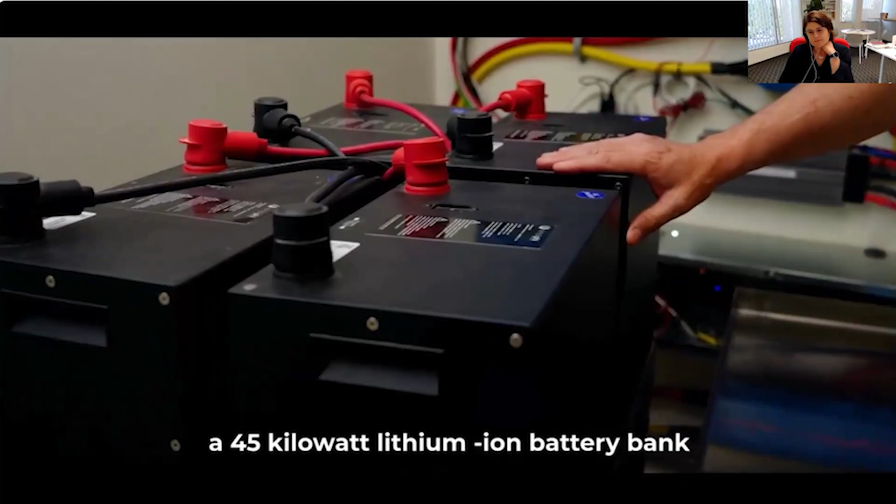The whole house is really beautiful. It's in Nevils Creek, and the house sits on 30 acres. The house is perfectly oriented east-west and true north and south to maximize the solar gain through the day. There's a 45 kilowatt lithium-ion battery bank that's accepting that solar charge all day long. My background is building high-end custom yachts. These yachts have the exact same systems that we've utilized here in this passive house. It's immaculate engineering.

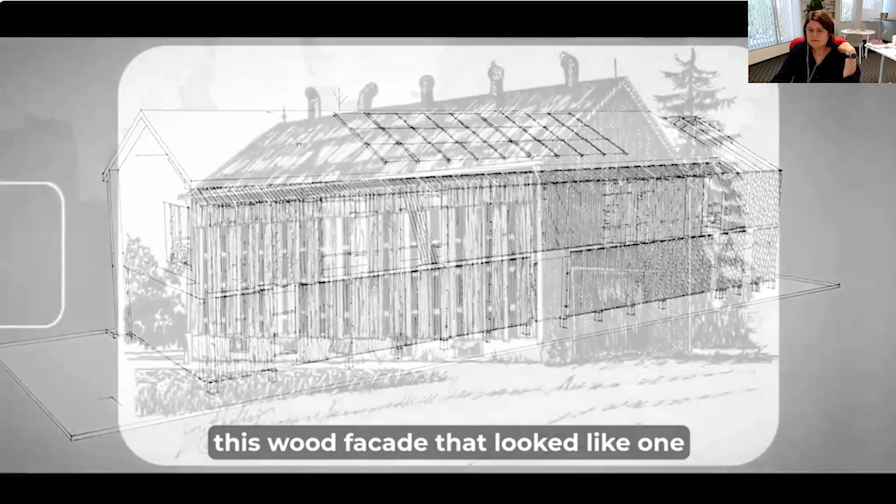The initial vision for the project was to create this modern black barn behind this wood facade that looked like one of the old North Carolina tobacco barns. The whole idea of the lattice is to have a passive architectural form that will prevent direct sun hitting the window. And the lattice is probably something that we worked the most on because it had to be not too dense and it had to be dense enough to block out the harsh summer sunlight. Another functionality was to have an outdoor space where people can move, like an outdoor corridor. You're still very much in tune with nature and how the sun moves around the house, so that's exactly what we wanted to achieve.

The windows are a revelation. You can sit in direct sunlight if you can find it, and it's comfortable because the window is actually reflecting that sun's energy. You're so well insulated that you need a lot less energy to heat and cool the space. The passive house is not only energy efficient, but it is super healthy. The envelope is fully sealed, but the air inside the home is constantly renewed with new fresh air that's filtered. The walls are actually 3 walls in one. We used an Intello membrane, which is an intelligent vapor barrier. That means it's airtight, but it will allow vapor to move in both directions.

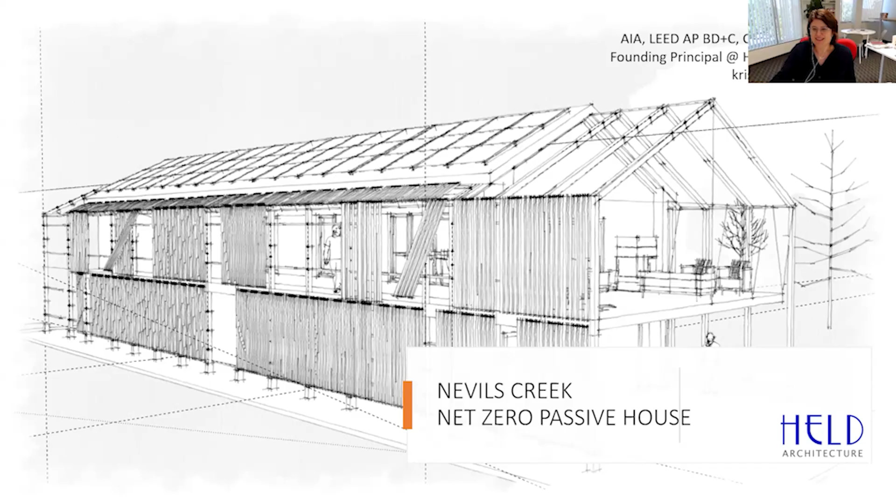So I'm starting with one of the initial sketches, and that is always exciting when the initial sketch actually looks very much like the final product. So it's an FYI here. And this is just a slide about me.

So Held Architecture does sustainable design and planning for all types of residential and mixed-use projects, including adaptive reuse and office. We do passive house also as consulting for bigger commercial projects, and we have used passive house design principles on projects like the office building in Huntersville.

So here are some of the projects we have worked with in the Southeast, because this is about the Southeast, and it's not as prevalent to be building passive homes in the Southeast because we have a mild climate. Although our winters, I have to say, are getting harsher, and we have a lot of humidity in this area, and some of the summers can get extremely hot.

So passive houses are really great in keeping the internal temperature of the house steady and giving you that user comfort that you need with high fluctuations of temperature between winter months and summer months. So like you see, these are all over North Carolina. We have one in Matthews.

We have one under construction in Charlotte, which would be the first certified passive house in Charlotte. And we just got full certification for the passive house in Davidson. That is not a net zero, but it does have a solar array on the other side of the house. We also worked on Waxhaw, Matthews, Carlisle, and South Carolina.

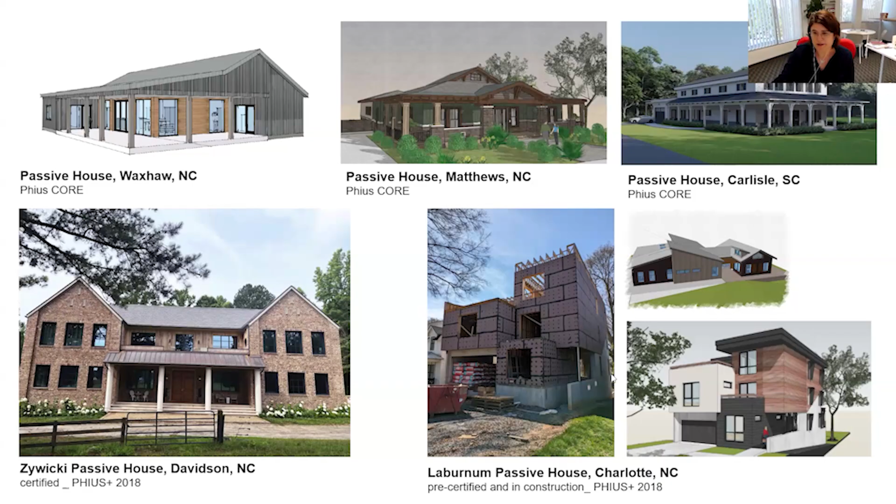And we use different methods to construct the walls for each of them. And as you can see, the style is varied. That's why I picked those examples. We have from traditional to very modern, farmhouse, arts and crafts, and traditional styles. And so you can do passive house in any form you want.

This project was the first passive house we ever did, so we are really proud of it. And it is a really special client as well, because he likes building himself. He's a custom yacht builder. And he was inspired by the traditional form of tobacco barns in North Carolina.

And maybe he liked it because it's a very monolithic form, and the proportions, if you would turn it around, sort of look similar to a ship hull. So it might have some association there. And let's see here, just I have,

so here is the whole team that helped make this project a reality. I was the CPHC lead and architect. WUFI modeling was done by Steve Schreiner. He's also a CPHC. Mechanical design was done by Wally Ray, who's a professional engineer with TLC Engineering.

Scott Westmoreland did structurals with Solid Rock. And the builder was David Sawyer Homes. And all the beautiful windows are Schüco windows, and they were imported to the United States by Baubach.

So the project started with the client calling me through the Find a Professional website through PHIUS. So that was really great. So we had a conversation, and he said he already has land, he already has plans, and all he needed was to convert these plans into a passive house. So there is more to passive house than just running the WUFI model.

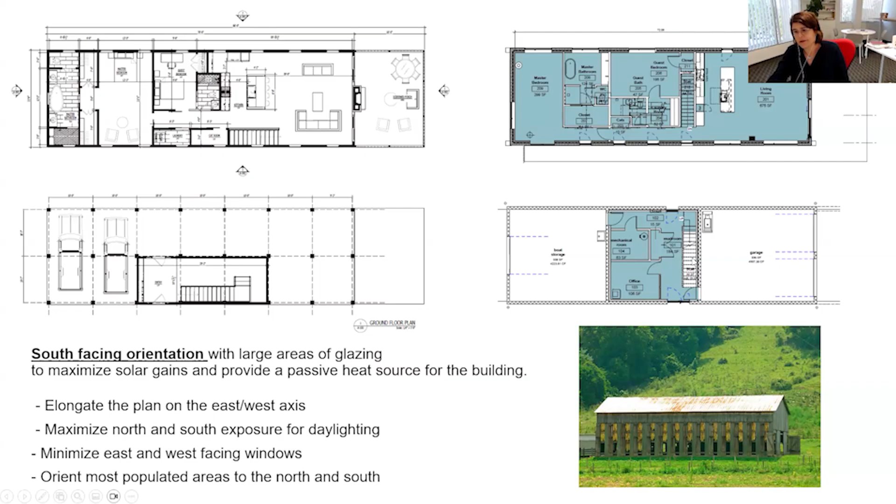We also enclosed the boat storage and the garage and created a conditioned entrance space with a nice stair going upstairs. So first, what I'm sure everybody does when they do passive house, they also incorporate some passive solar strategies.

So the long axis is east-west, with the long facade facing south being shaded and the north side being just exposed to diffuse northern light. The angle of the roof has been determined by the best suitable angle for North Carolina for harvesting solar energy. So that's how we got the roof pitch.

And it actually turned out a really monolithic, simple structure where you have the black core and then the lightweight wood structure hugging it. And the landscaping is also really beautifully done. When we first saw the site, it wasn't as cleared and manicured like it is now, and you actually were not able to see the water. Now they cleared all the small branches and the lower brush, and you can see the water, and it's really beautiful.

This is the north side. So just so you see how we treated each side differently, depending on what sun exposure it has. So the north basically doesn't get any shading. It has diffused light all through the day. It has beautiful large windows for daylighting, even the bathroom. So there's really not a room in this house that doesn't have daylighting, which is really important just psychologically. You can just move through the house and you don't have to turn on a single light switch. It's pretty nice.

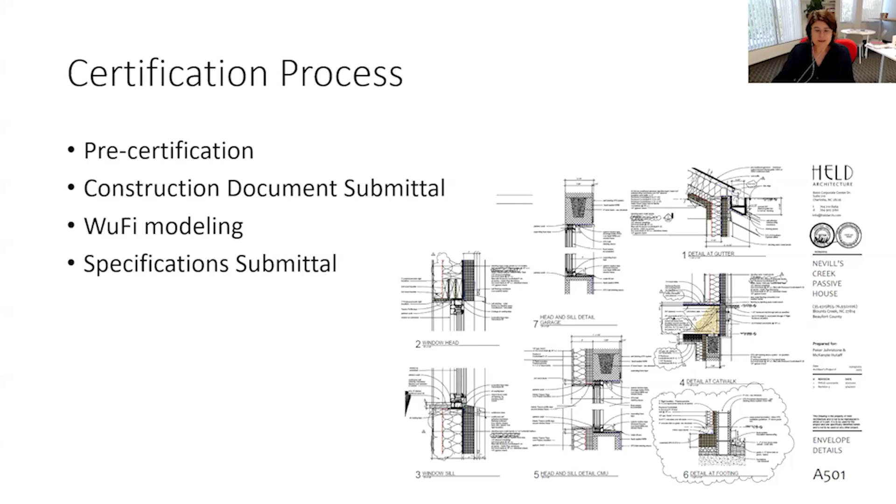And then I'm going to try and just flip through the construction set. So for those who haven't seen one, I'll just quickly share. Let's see. I'll just go quickly through it from the beginning.

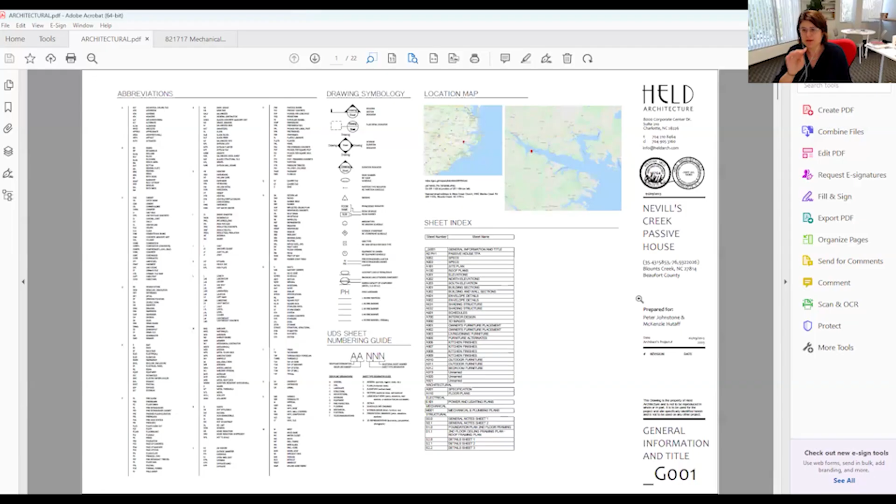So this is about the certification process as well. So for pre-certification, we submitted the entire package with specifications, structural, mechanical, detailing, the whole set. So it is a pretty extensive set, and that's why I really appreciate the Passive House Institute, because as an architect, you can get a peer review of all the detailing, and they really carefully review it. And then when you get a comment, you're like, aha, yes, that really needs to be changed.

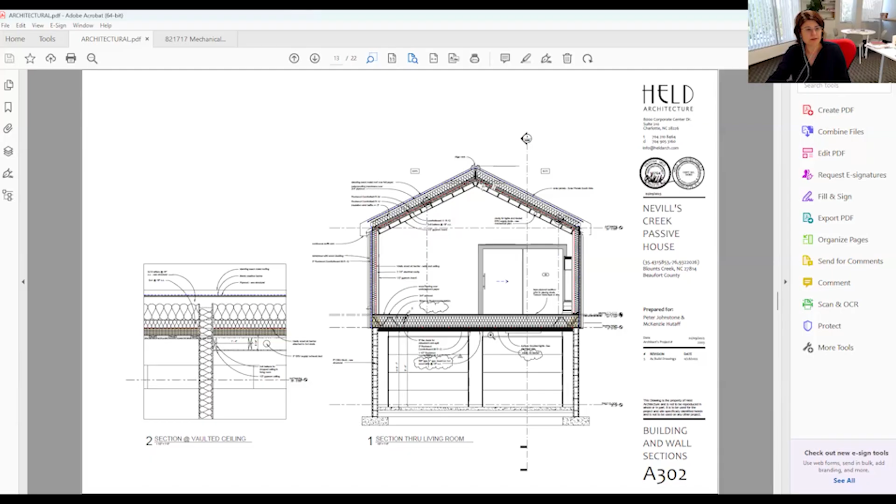So for this house, we got an interesting comment for insulating the garage. So we did this with EPS, I think, with rigid insulation. And the comment was that we really shouldn't completely seal it, because if anything leaks, moisture wouldn't be able to trickle out and it could rot the structure without anybody knowing. And it could potentially be a structural hazard. So we changed it and did mineral wool and Intello between the garage and the living space above.

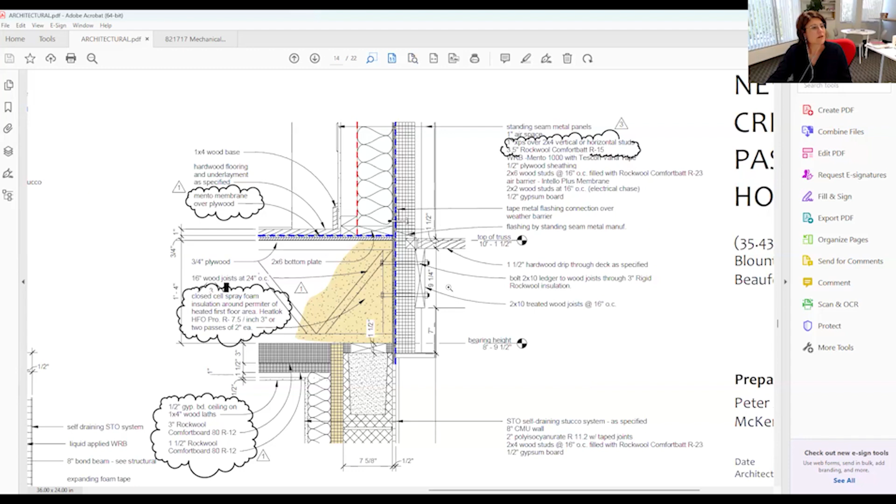And then we just worked out details, how to attach the catwalk through the rigid insulation to the rim joist with closed cell foam to get no thermal bridging there. And yes, that is the set all the way through the end. And even some interior design for this.

And then you also get a Dropbox folder where there are pre-made folders for you to fill in. And all of these categories basically have to be answered. So there's a lot of information you submit for pre-certification. And it's really nice because, like I said, you get the peer review and get another set of eyes to look through it.

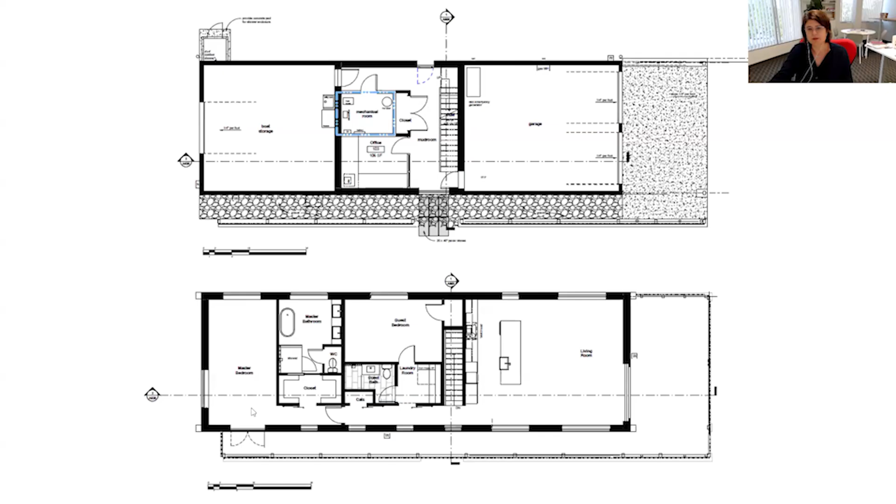Here are some simplified floor plans. So you can see the long catwalk around and also the openness of the structures with vaulted ceilings in the living room and the master bedroom. And here is a cross-section of the house where you can see the continuity of the insulation going all around. And we have some CMU walls on the first floor around the garages. And then it's 2x6s that create the rest of the structure.

And we were using the Intello to be our air barrier on the inside. And we had a Mento wrap on the outside of the 2x6s, a 2x2 electrical chase, and then on the outside, a rain screen. So this house was built during COVID, so they couldn't find the mineral wool at all. So they wanted to substitute it. And I really wanted to stick with Rockwool. So we had less before. I think we had like 2 inches only that was needed.

But then they had leftovers from a big commercial project, and the only size they had left was 3.5. So we used it, and that's how we got a little bit more insulation in it. And it's such a small house, so it was perfect. Just what got left over was perfect for the house. Here's also how we dealt with the continuous insulation from the slab and the CMU wall.

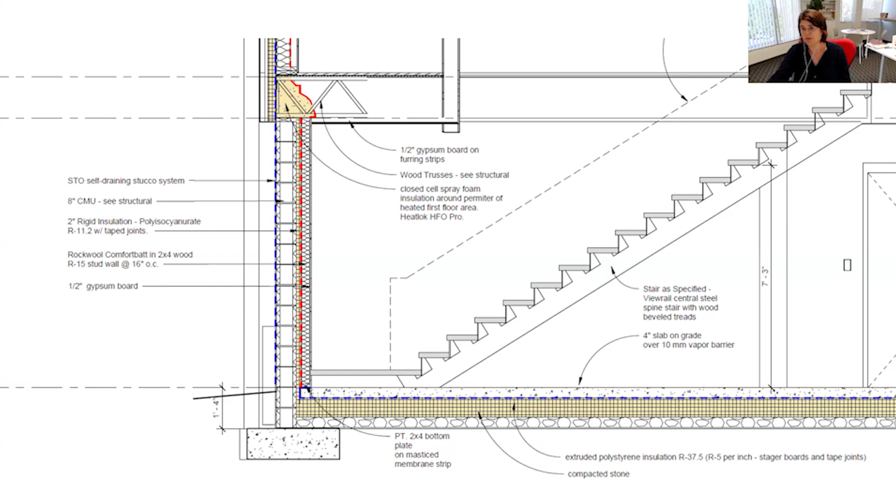Up here. So in the south, what works really well is when you can combine mass walls with continuous insulation. If you have 2 inches of rigid insulation, it will effectively operate as 4 inches, just because the thermal mass really helps keep the heat in, air conditioning in.

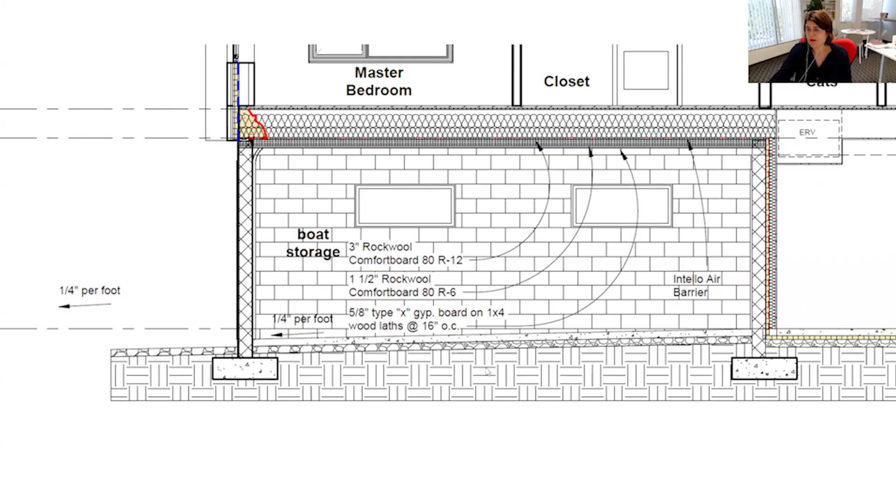Some other sections. We really used the Intello barrier here because everything was fluffy insulation, and it was very breathable with the combination of Mento membrane and Intello air barrier. On other homes we use ZIP, and with ZIP, we do not recommend or haven't used the Intello air barrier. It would be too dense, too tight.

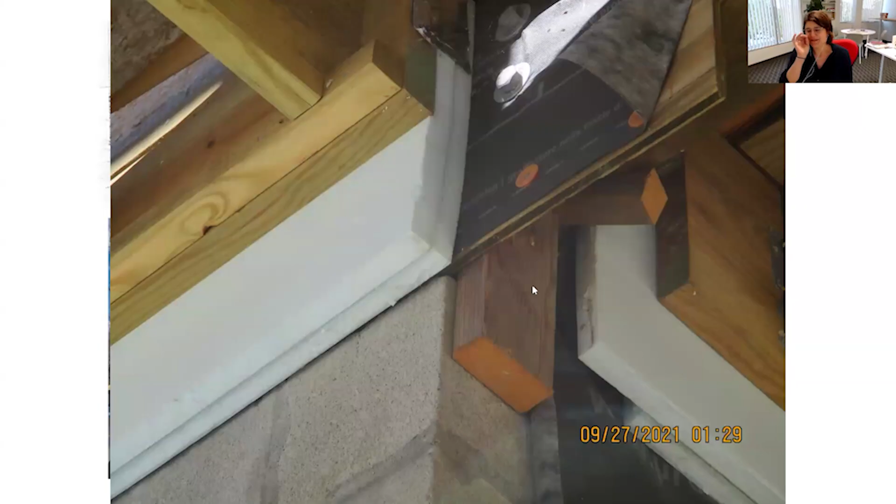Here's some construction photos. And again, the sketch, it looks pretty similar. Here is the mineral wool going up, and the stucco is on the first floor CMU, and the structure is going up for the lattice. Solar panels are already on, everything going according to plan. And here are some other construction details we shot just to show how the continuous insulation actually separates that catwalk from the CMU and from the insulation.

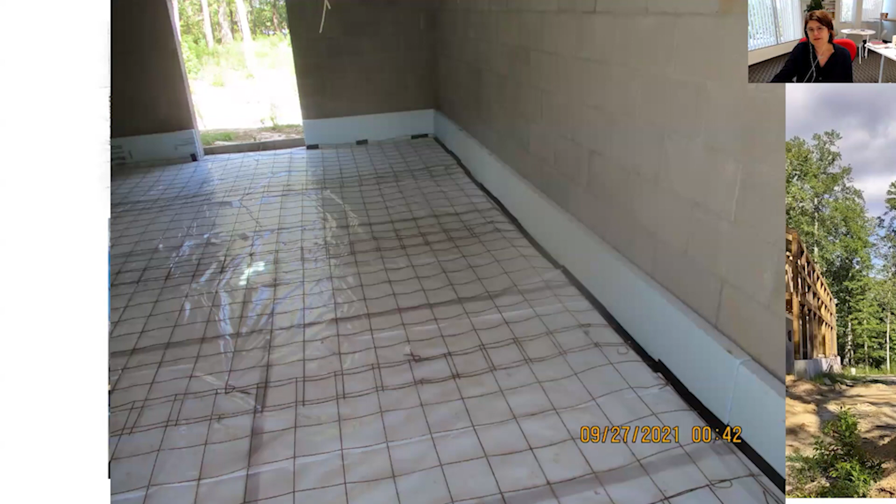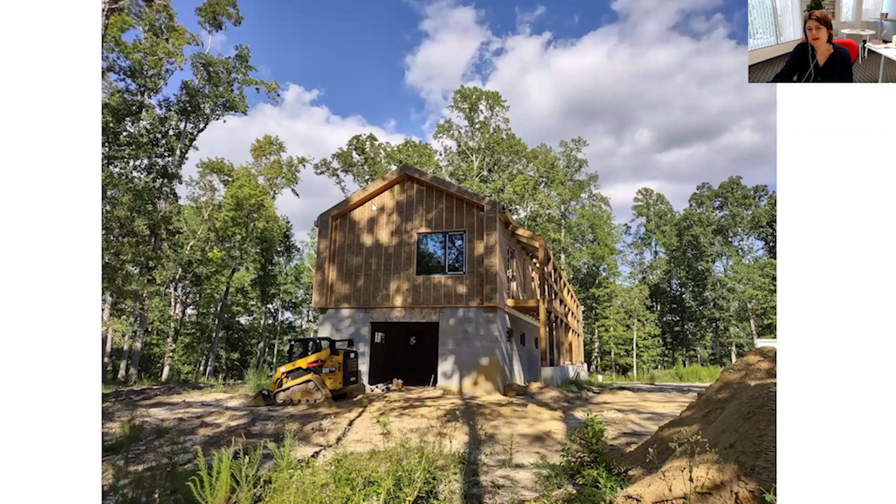Here is the heated area, insulated, other picture, Intello. And since the house was remote, this was a long process of building it. So that is what's difficult with homes that are very specifically built. Also, the gutter was almost an internal gutter. I mean, you don't see it from the outside, but it is outside of the envelope. So that was interesting to construct, but they did it, which is amazing.

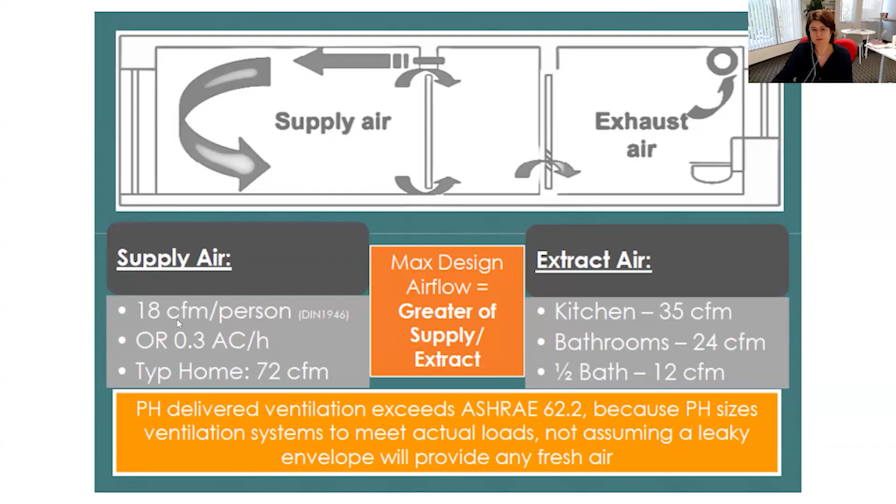And just for mechanical, we started with what everybody uses on a passive house, what is given and recommended for exhaust and for CFM per person. And we had a mechanical engineer draft the mechanical drawings for us. We ended up putting the mini split and dehumidifier in the attic space. There is a ladder right here, and we have some exposed ductwork in the master suite and the living room in the vaulted ceiling areas.

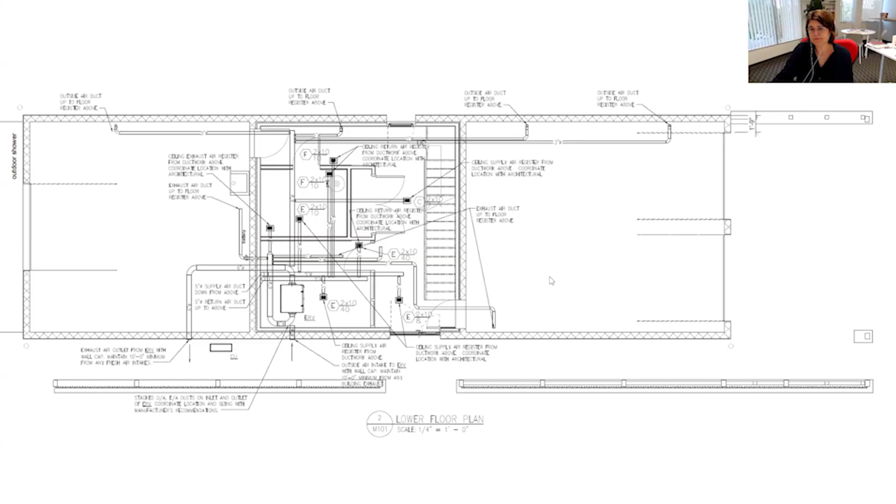And in the first floor, we kept the ERV, and it had smaller ductwork, so that fit within the floor joists. We'll get to that. And this concludes the presentation.

So when we filmed, the cat was following us everywhere, and it really enjoys the catwalk. So it's actually used by a cat, so really like it.

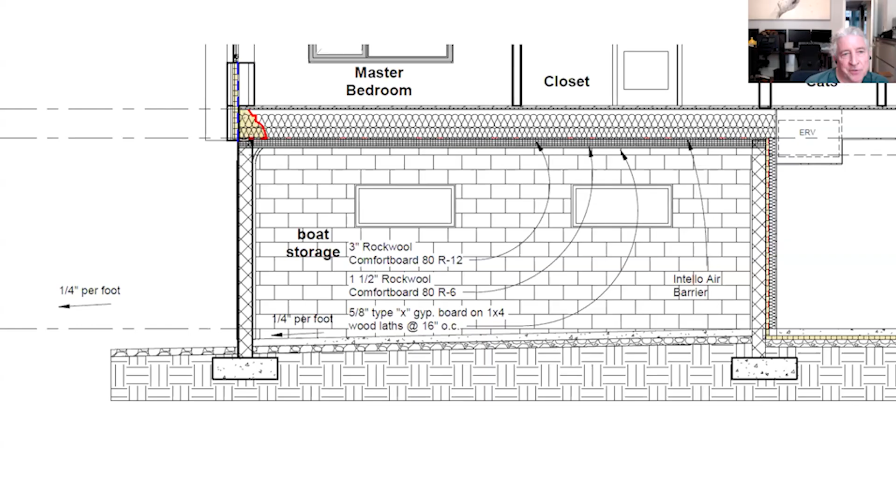And yes, it was important to me to vent below the panels. I thought they would heat up a lot. They are black too, and with the solar panels, it's not great. This was my first passive house, and I was very enthusiastic and trying not to use any foam. There is no spray foam. Well, there is XPS under the slab, but that's about it.

So the roof was insulated all with mineral wool. And then you have Intello as the air barrier, and that's really it. That's pretty simple. And then you just vent over it, and that's supposed to cool the house. So it's basically like a rain screen above there as well. I don't know if this helps you.

So you don't have continuous insulation on top of the roof sheathing. It's all in the cavity on the roof, and then it switches to the wall. This yellow thing is really the continuous. It's below the rafter. Okay. And then everything else is in between the rafters. Yeah, and then you get some ventilation there.

And I love the vented roof approach. I just think it's so smart. And especially when you're putting solar panels on, sometimes those get very hot. So it's really nice to release that heat from that sweater that we're putting on for passive house. But spoiler alert, Kristina, this is your first passive house. This is absolutely fantastic. That was the first one, yeah. Oh, congratulations.

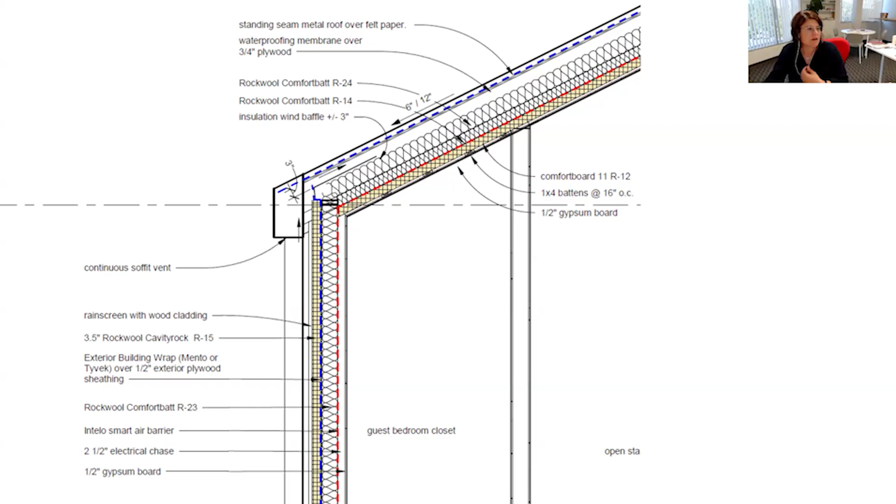I need to bring up that detail for it. It's right here. Let me see if I can share that. Oh, you're so kind. That's very gracious of you. Thank you so much. Yeah, this is how this worked.

Oh, wow. You're the best. This is fantastic. It's a crazy detail. This is why we're here. This is really beautiful. Thank you. Yeah, and it's nice because I didn't want standard gutters hanging off of this really nice modern house.

And also I was really scared to put them inside of the envelope because, you know, if something leaks. So this was hard to do, but it was good because now if it leaks, at least it's outside and you don't see them. So I got the best of both worlds. And it looks very easy to clean. And if there's an overflow, it looks like it's got the direction it wants to go.

I've done integrated gutters in the eaves before on very low pitches and had ice dams and had to put tracers in them. So bravo. This looks really great. Thank you. Yeah, we don't have that problem that much with ice, although it can happen. And you have a good north slope. North Carolina. Yeah.

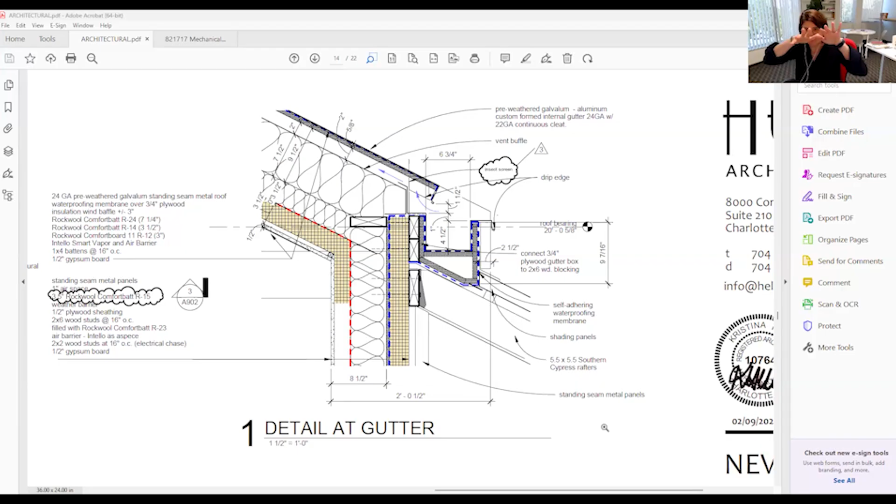And then also the wood you see ties in there, so it all looks seamless, so you don't really see the gutters at all. Beautiful. Nice, yeah. Thanks.